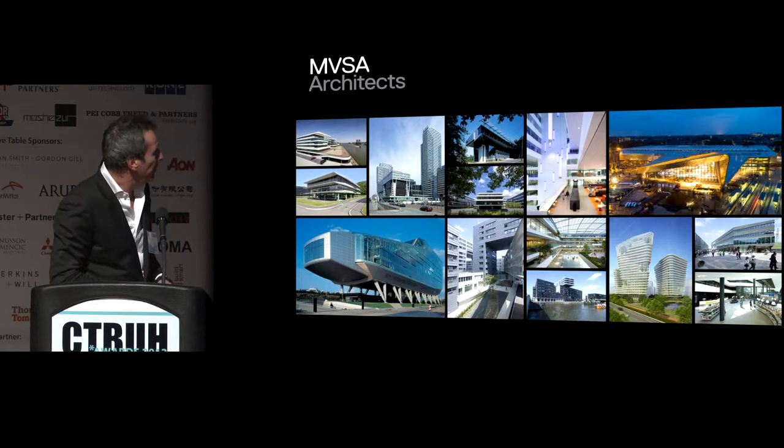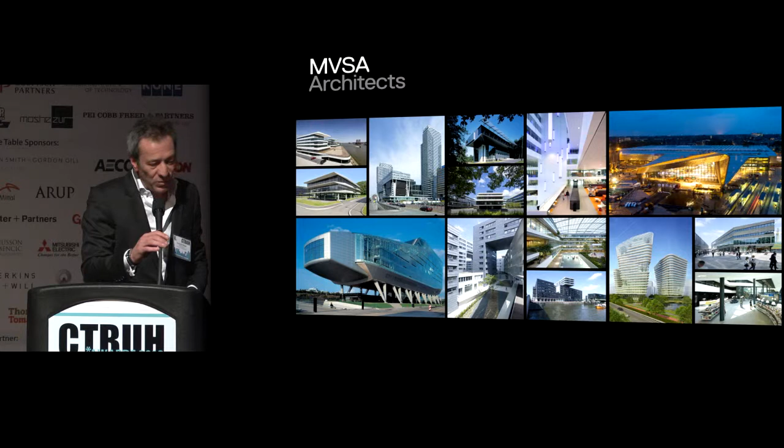Who are we? A really short introduction. Our firm was founded in the early 80s, and we're working on several projects: offices, probably you know the ING headquarters on the left corner, also universities, and we're building our first hospital now. On the right-hand corner you see the new central station of the city of Rotterdam.

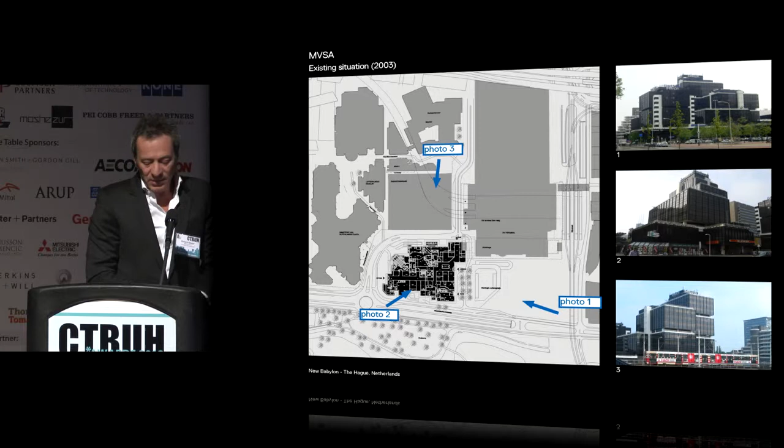Well, New Babylon. We started 10 years ago with this project. It was a building from the 70s, a structuralistic building, adjacent to the central station of the city of The Hague. It's a very introvert building, didn't have any dialogue with the surroundings.

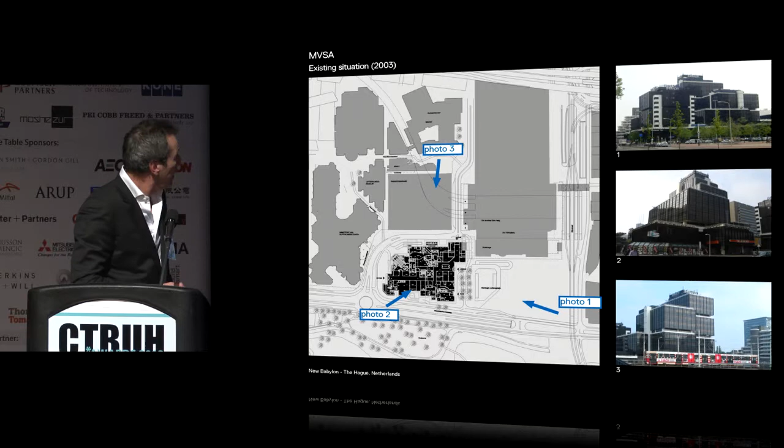Our goal was to preserve as much as possible of the existing building. The existing building was approximately 50,000 square meters: a shopping center, hotel, cinema, and offices. This is as Babylon was, this is the shopping center, so it's very dark, very introvert. And it ran out a little bit in time and wasn't well maintained.

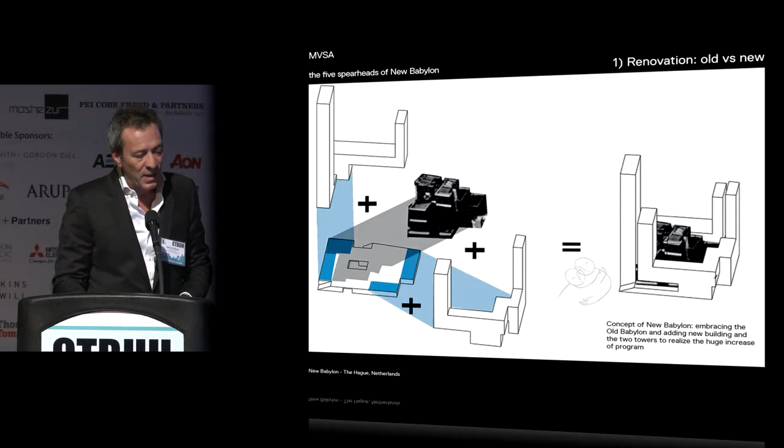We've got several spearheads for this project. I will talk to you about each of these points. Very important was, how could we densify the city on such an important location, preserving the existing building as much as possible.

So our main concept was to embrace the existing building just by expanding the footprint with 3,000 square meters. We added 90,000 square meters. So the theme is how to deal with the old building and the new, and the dialogue between those two.

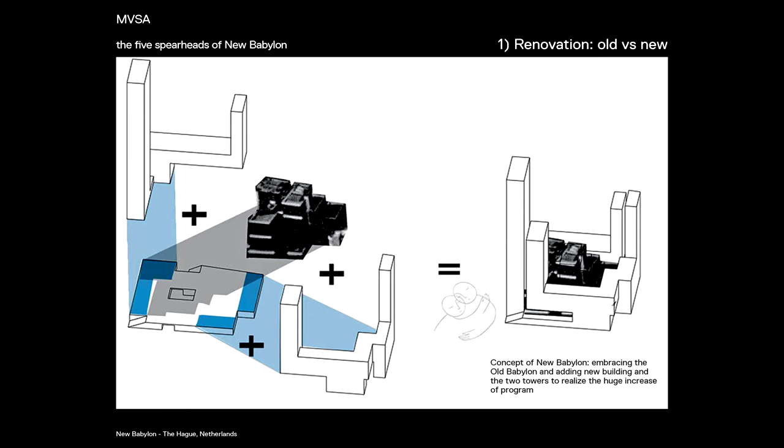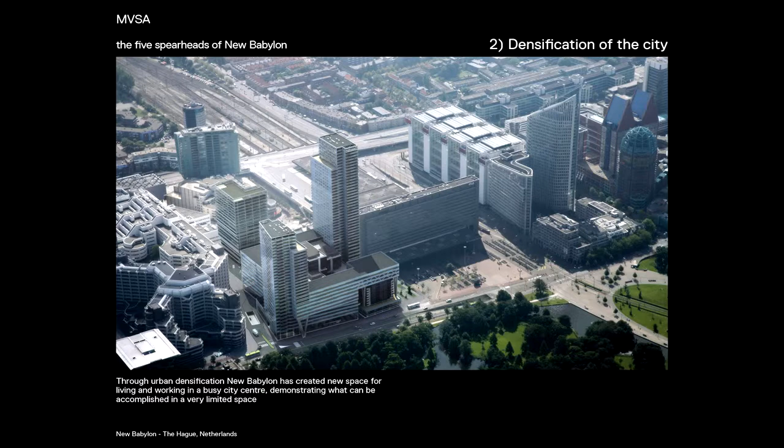What you can see here, because I strongly believe in densifying our cities, especially adjacent to a transportation hub like the central station of The Hague, a kind of gate to the city. You can see the location here. Adjacent are all the ministries, Ministry of Finance, so it's a place where we could add also a residential program.

So our goal was to make, instead of an introvert building, to embrace the old building and make it very extrovert, especially by adding the housing volume of 335 apartments, which makes it also a more lively place.

There are several scales in this project. First of all, what does high-rise mean? Well, in Holland, this is a tall building for the Netherlands - in general it's 140 meters. Most of the tallest buildings are 140 to 150 meters. It was really important to study how to densify the city in this place and what it would mean for the skyline of the city.

At the same time, the program we added in the plinth creates a kind of dialogue, new public spaces with program that would feed that public area. At the same time, the complex, because it's a huge complex of 140,000 square meters, also needed a kind of human scale - for example, you can see the gardens on top of the second floor.

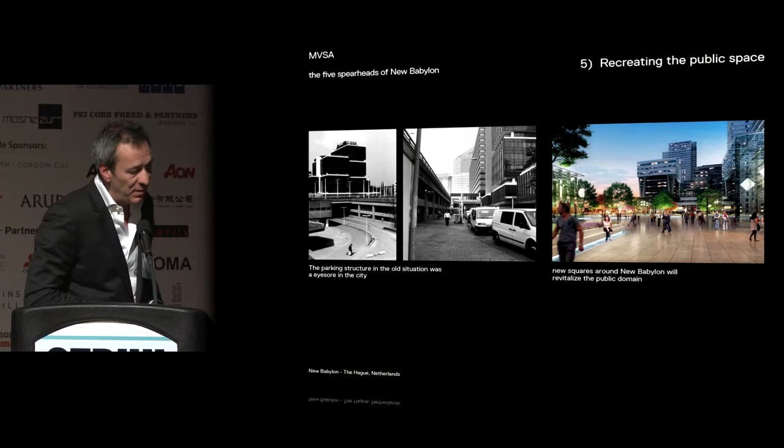Important, and what made it special, is when you see on the left-hand side the image, there was a parking garage behind the building. What we did, by densifying the project, was make a new parking garage underneath and create a new square. So by densifying, we were able to make new public spaces in this part of the city.

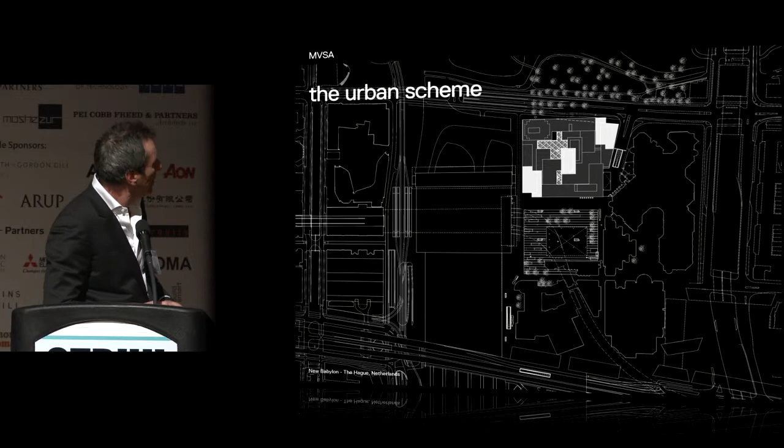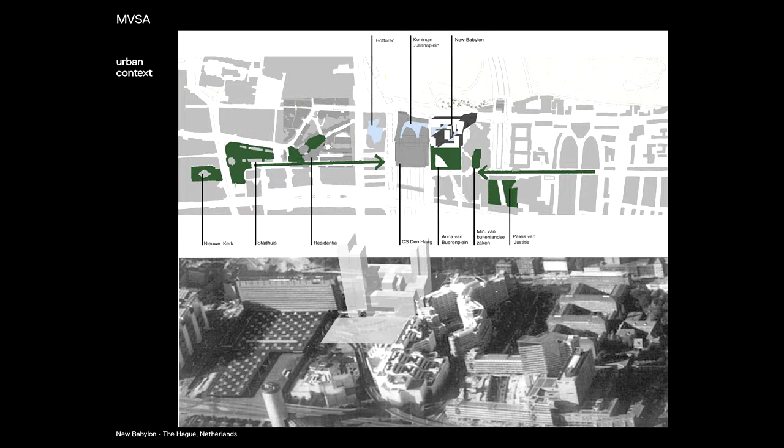This is the urban scheme. What you can see is, if you look at the urban fabric of The Hague, you see the central station, CS Den Haag, and you see the green arrows - those are an important pedestrian route connecting all the important buildings. For example, on the left-hand side, the City Hall, designed by Richard Meier.

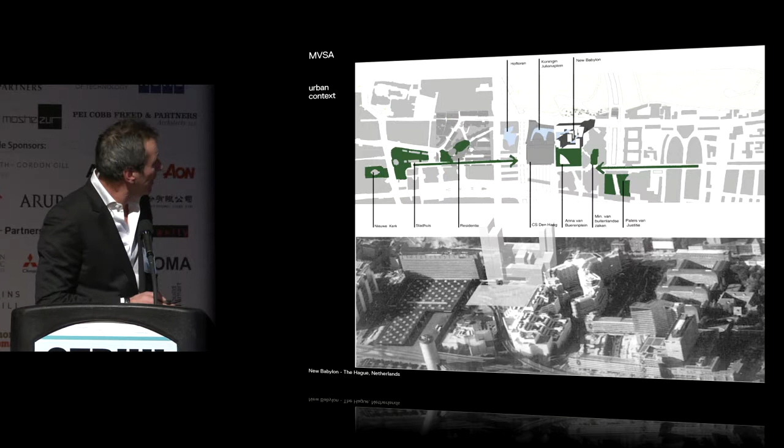And there's a kind of sequence of squares which end in the central station. At the same time, we were able to make a new square connecting in that sequence, that pedestrian area, with the new transparent hull of the central station.

First, we made a study of the skyline together with the municipality, and we concluded that in the second line we could make buildings up to 150 meters - that's the top scheme. The middle scheme is the first line adjacent to the park, approximately 100 meters. You also can see the M building, designed by OMA, Rem Koolhaas, who's speaking this afternoon. Unfortunately, that building is on hold.

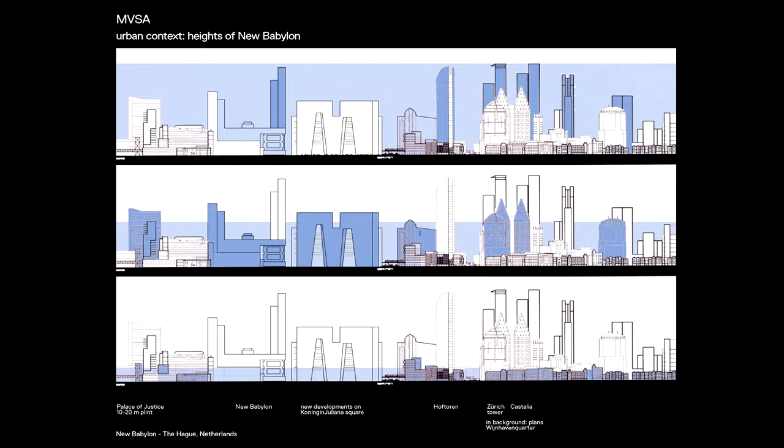The last scheme is also important because we use the historic height of the historic city, 25 meters, and you can see it reflected in the plinth of Babylon, like a kind of complementary height at the cantilever and the overhang of the building. Top scheme is how it used to be, and underneath, the new.

Here you see how we could densify the city, embrace the old building, and at the back you see the new square. We made the new parking garage underground, and on top there's a building designed by Wiel Arets with student housing. So including the residential part and students, it makes the area also more livable.

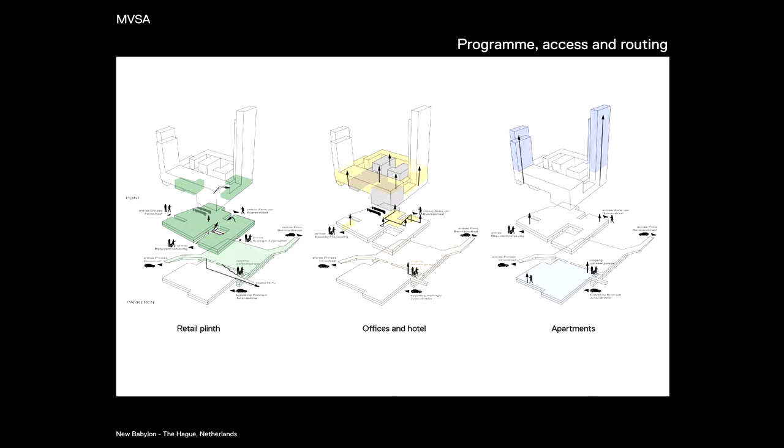The program: we've got the plinth, of course, parking - a new parking garage for 1,250 cars. The plinth has retail across two stories. On top, the offices, and the towers where the residential program for the apartments starts, at about 40 meters above the offices.

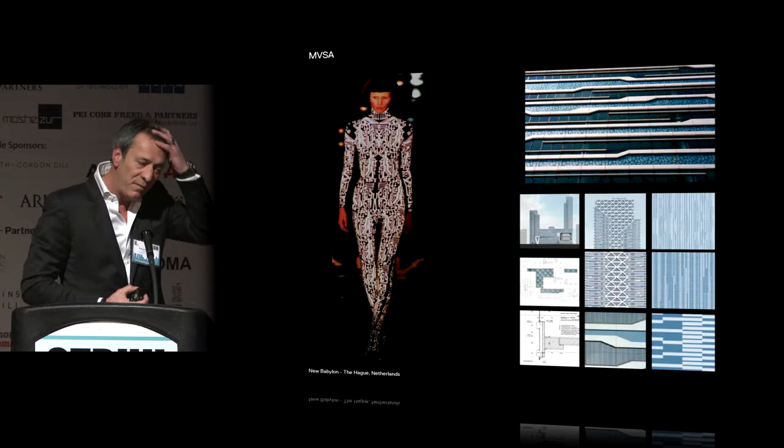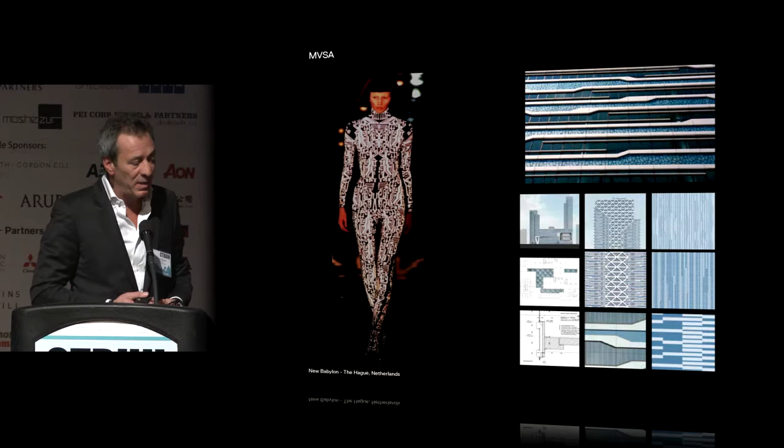Well, we had embraced our concept to embrace the existing building. We had to develop a strategy for how to deal with the facades. We wanted a horizontal facade to enhance the embracement. At the same time, we had several heights - the existing heights of the buildings, the plinth, the apartments, the offices - all different heights. We designed a prefabricated facade in which we were easily able to change those and adapt to the several heights of the functions in the building.

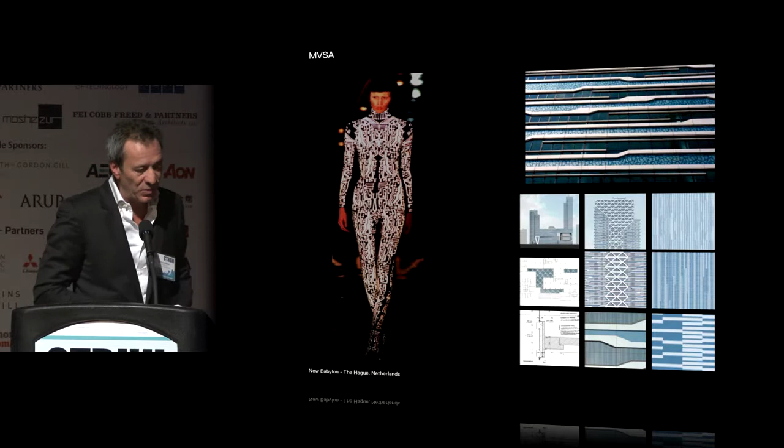At the same time, we also have a kind of print in the glass. It's aluminum and glass. When you come closer to the building, you see other details. So it works differently from a distance. When you come closer, you notice much more details.

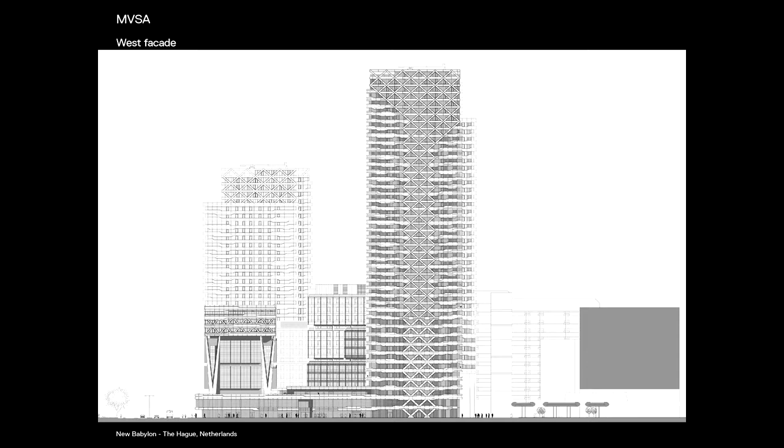And here are the images. Also, what we did is express where there is structure, so you see the structure in the way the facade is treated. The towers are getting more transparent at the top.

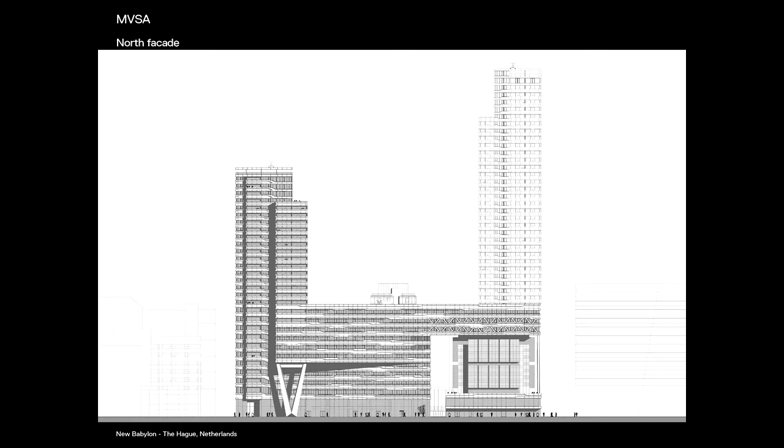And here, the facade facing the park, and also the 25 meters height of the historic city.

What was really complicated - well, the retail plinths - we also did the interior design. We've got the theme of all the glass walls with the hanging gardens of New Babylon.

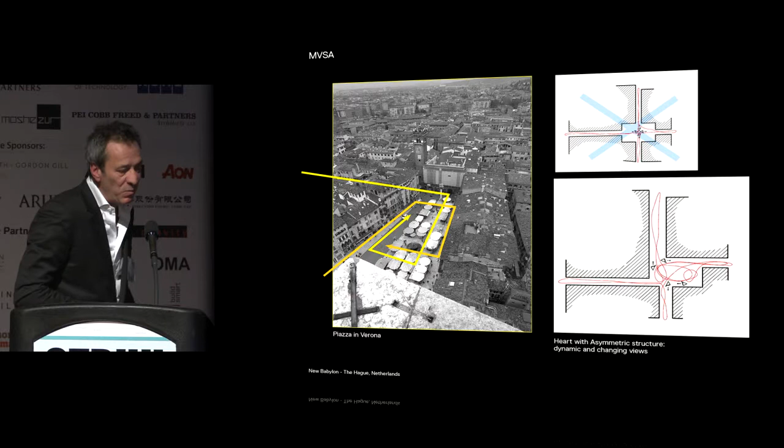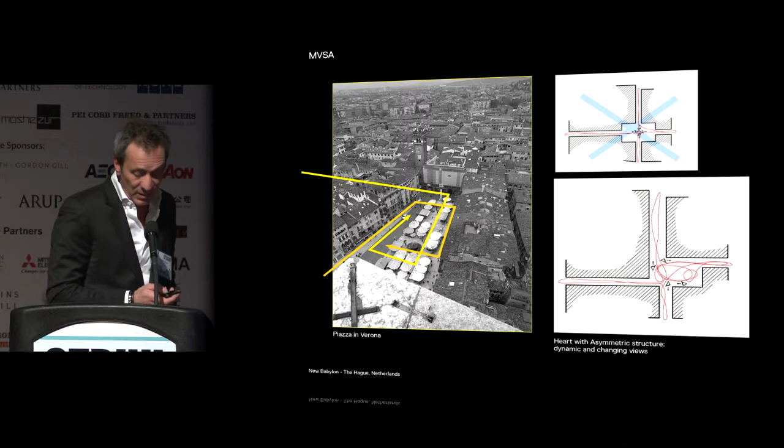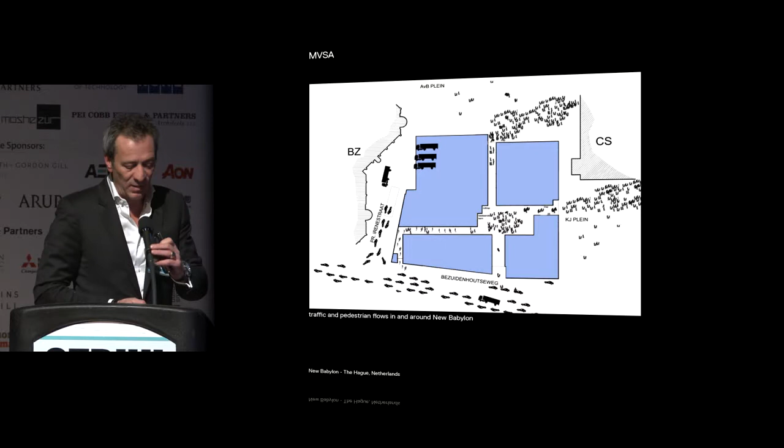One inspiration was, for example, a square in Italy. We wanted to make a new heart in the plinth with daylight, with a kind of asymmetric approach to that new center. A lot of people come out of the station and go through the building to the ministries close to this building and the offices.

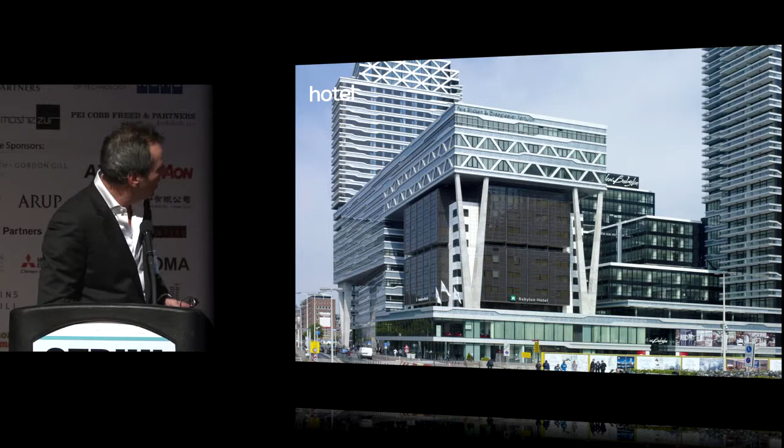The hotel - well, that was a very complicated issue because the hotel was owned by a French chain, another owner. We found it really important to integrate the hotel in our concept. So what we did is build offices on top of the hotel, and the hotel was only closed for a couple of weeks.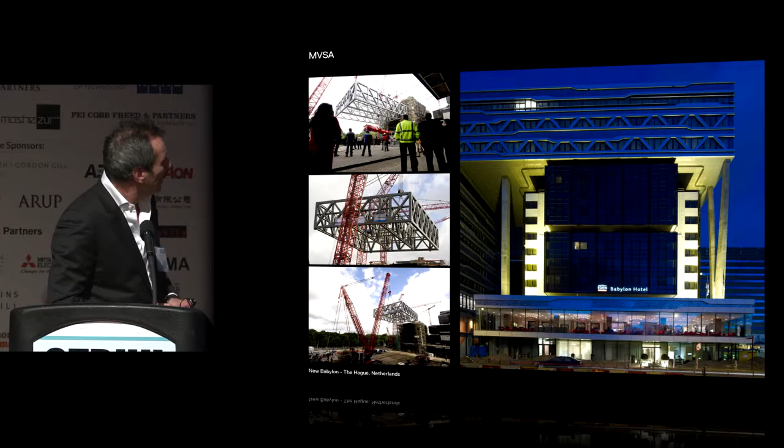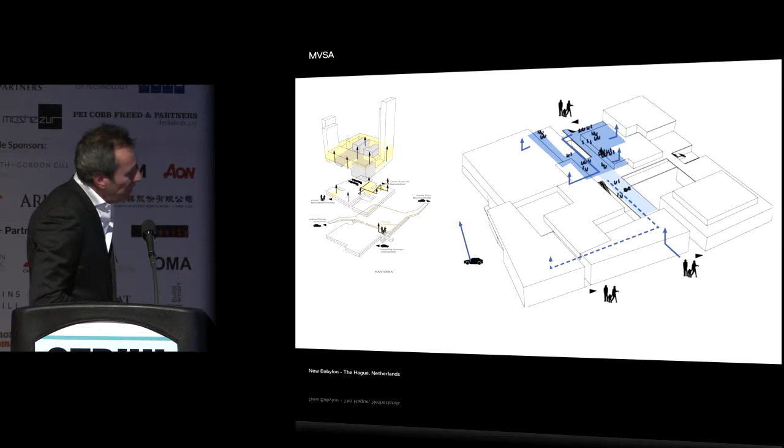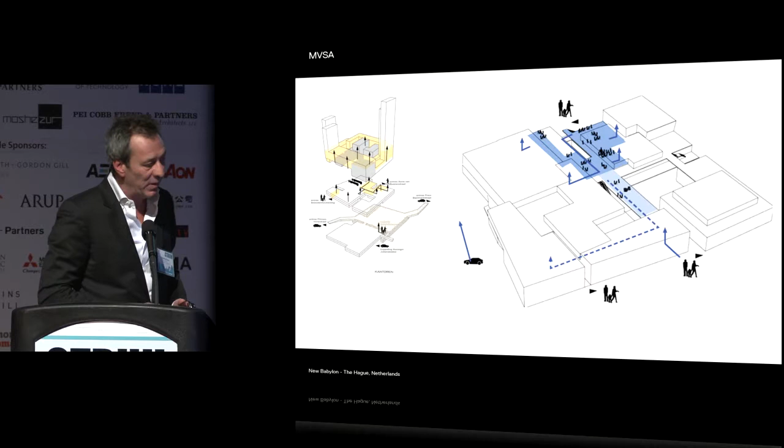And here you can see the old and new offices. One of the main issues was how can we connect all the new offices with the old offices. So we made a lobby on the second floor, and from that lobby you can reach all the offices - the new ones and the cores of the former existing offices.

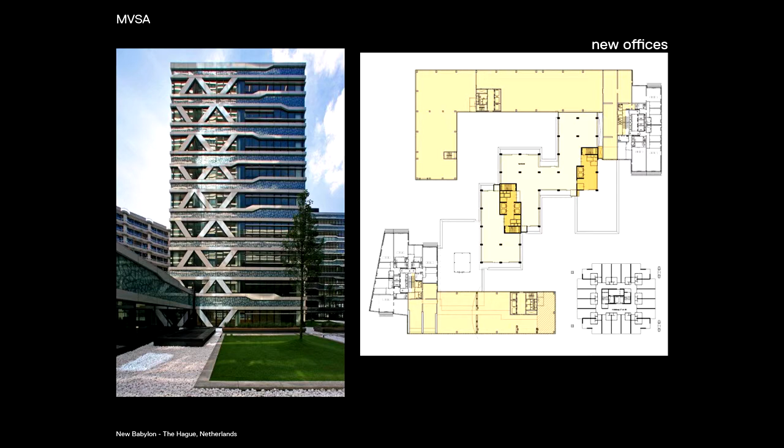And here are some examples with the main lobby. So you see in the middle the existing offices with the old cores, and the new offices surrounding them.

We also saw the qualities of the existing building, and I'm very happy it wasn't demolished because I don't think that's sustainable. You can give a building a second life.

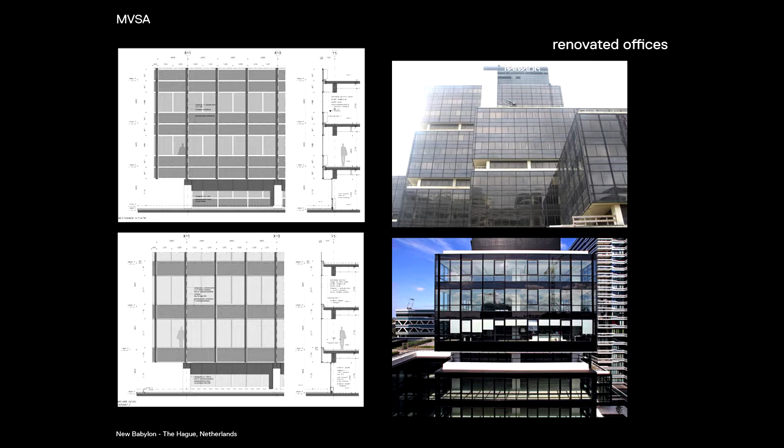And what we did is analyze exactly the main themes of the existing building. We altered the facade, made it more comfortable, more up-to-date, more transparent, while still preserving the same proportions of the old design.

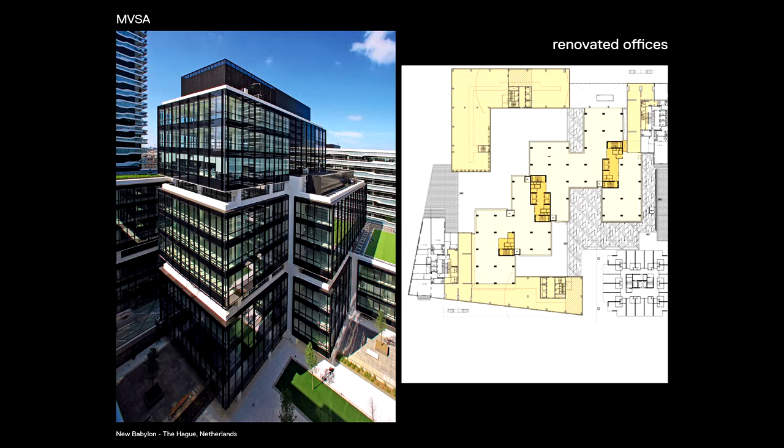Interesting is all the spaces between the old and the new buildings, the dialogue between them, and the new areas.

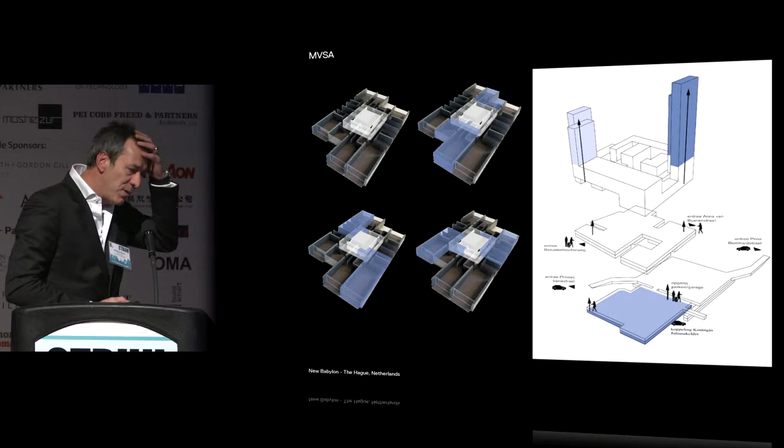The residential program, the two towers - what we did with the floor plans, we've got six apartments each floor, but we shifted them a little bit. For several reasons, because those are the two points where the embracement of the existing building connects together. At the same time, we were able to give all the apartments extra views.

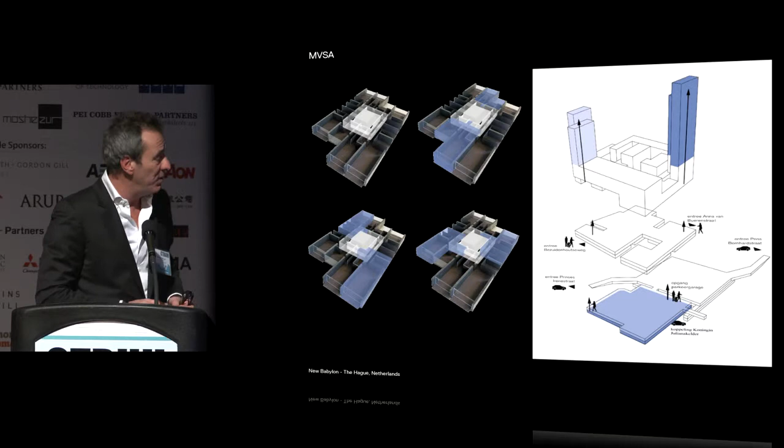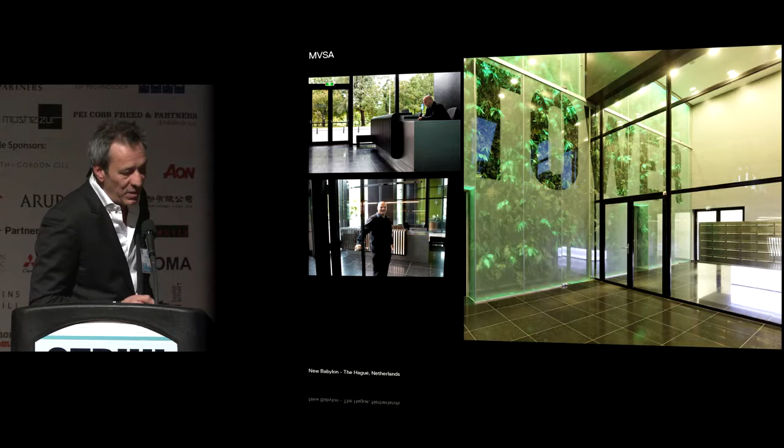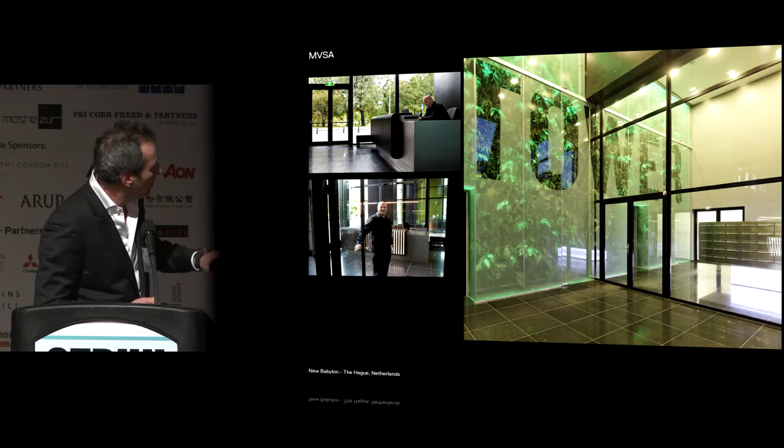Because of the shifting and the extra facades we designed. Another reason is, of course, the slimness of the towers, that they look slimmer. The entrance halls of the two towers, also with the screened glass, with the hanging gardens behind.

And the towers - we are very happy that we designed balconies. It was really an issue; we talked a lot about it because it's windy, but still all the people living there now are very happy that they have their own outdoor space. What you can see is also the shifting of the floor plan, so the towers look much slimmer.

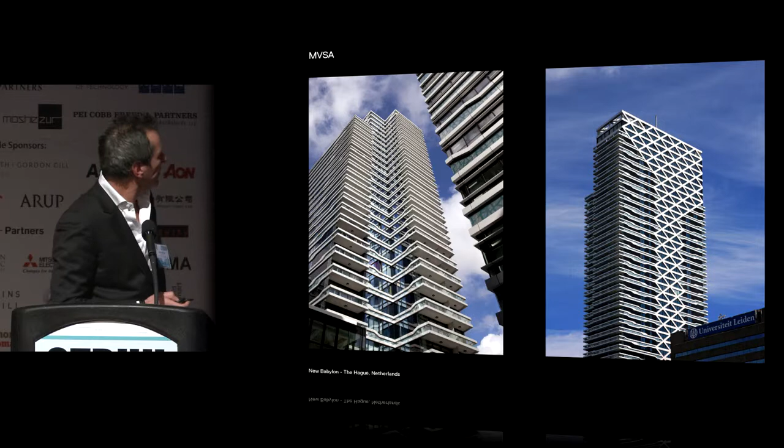Near the balconies - one view of one of the apartments. And the view, it's very close to the sea, and we've got a view of the historic park. The design of the roof gardens was important also for that human scale.

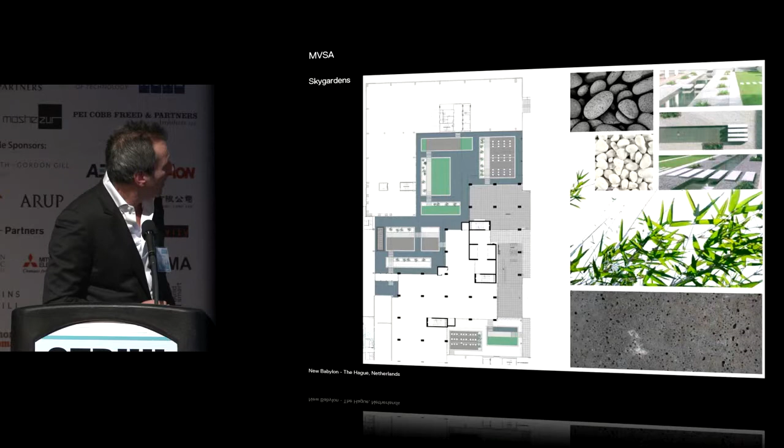Those are the materials we used. And all those places connect - for example, here, one of the restaurants in the building - they also have their terraces outside on the second floor. And there are also terraces for the offices, so people really enjoy using those terraces in summertime.

Well, one of the main issues was how can we densify this location while at the same time making a building which has a dialogue with the surroundings, with the public space, and creates new public spaces. Instead of an introvert building, it's very extrovert, and the positioning and extra program we added on the ground floor makes it possible to have a lively plinth.

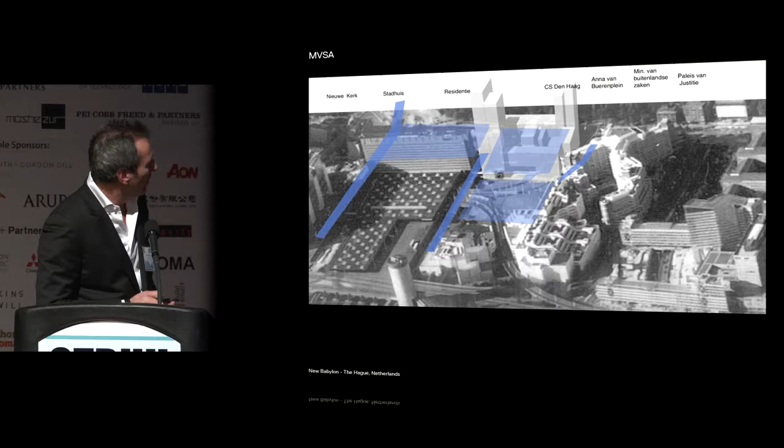This is the existing Babylon. We started building the parking garage. It's rather difficult because it's underwater concrete, made by divers underneath. We also had a rather complicated site here because of the railway and the trams.

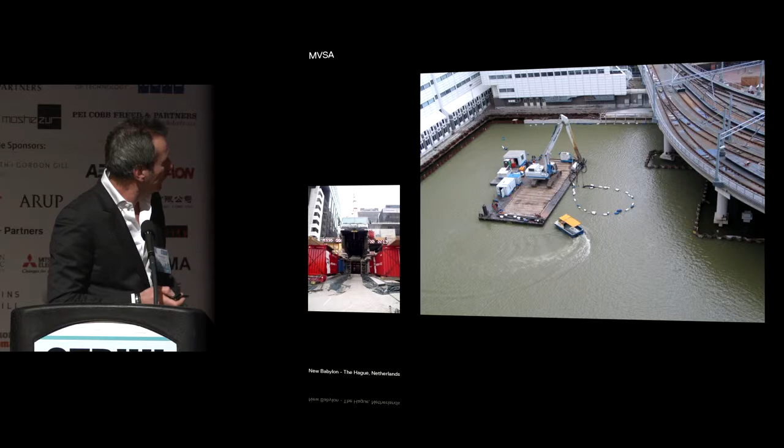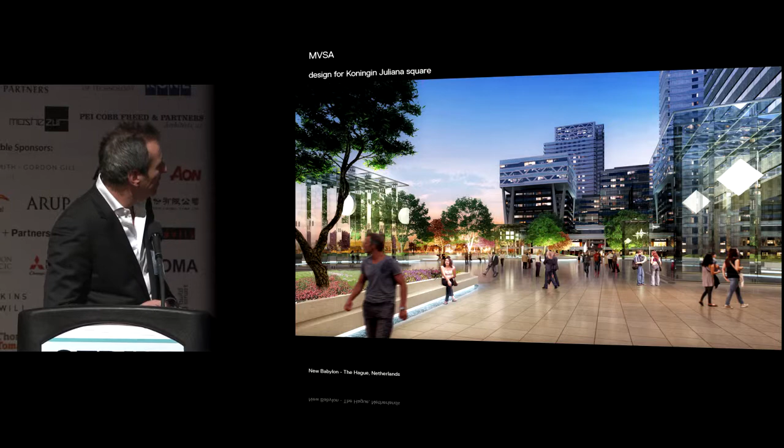This is the main entrance to the parking garage from New Babylon. Well, some views of the public space which is being made now. So we tried to really add a new public space to the city.